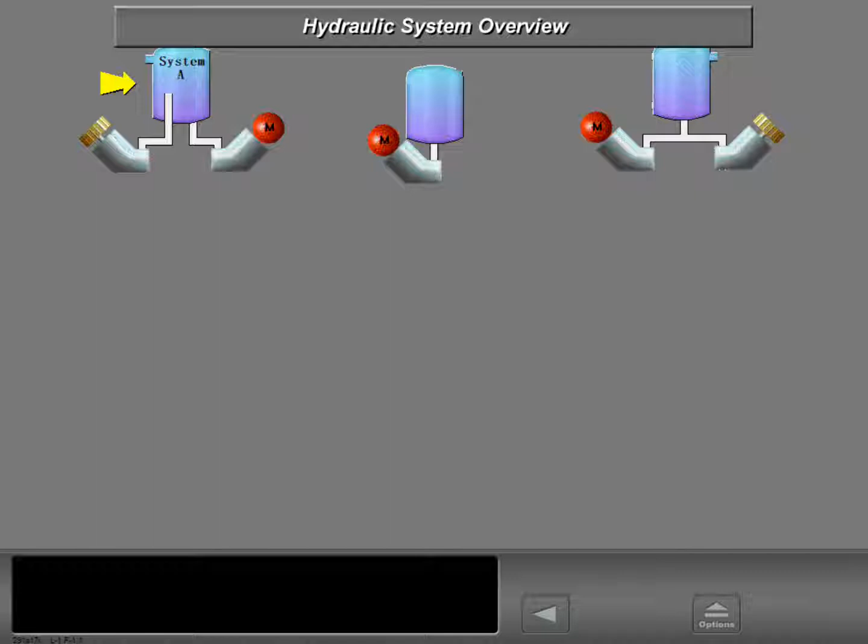The 737 has three hydraulic systems: System A, System B, and the standby system. The hydraulic systems have reservoirs in the main wheel well. System A and System B operate independently.

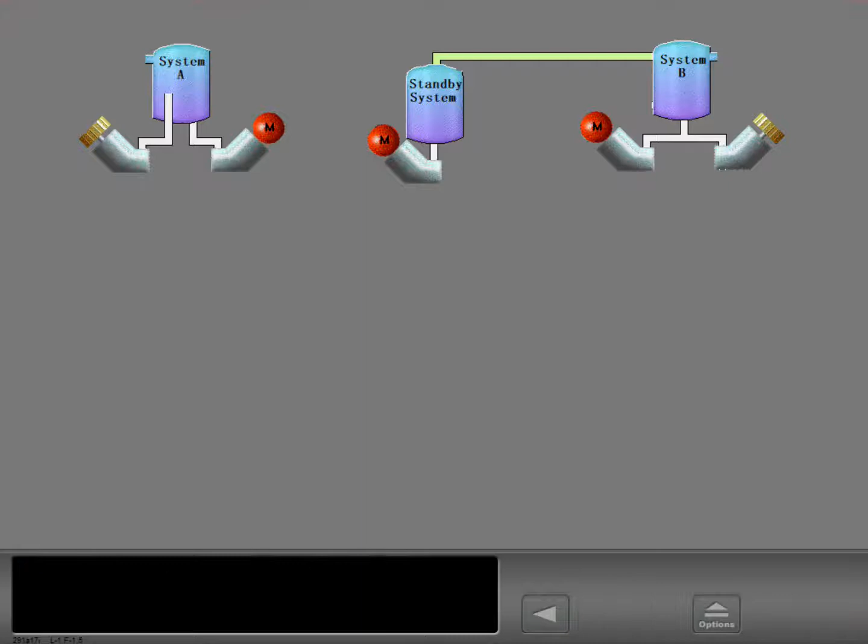The bleed air system supplies air pressure to System A and System B reservoirs to ensure a positive flow of fluid. System B supplies pressure for the standby system, and a hydraulic servicing line connects System B and the standby system.

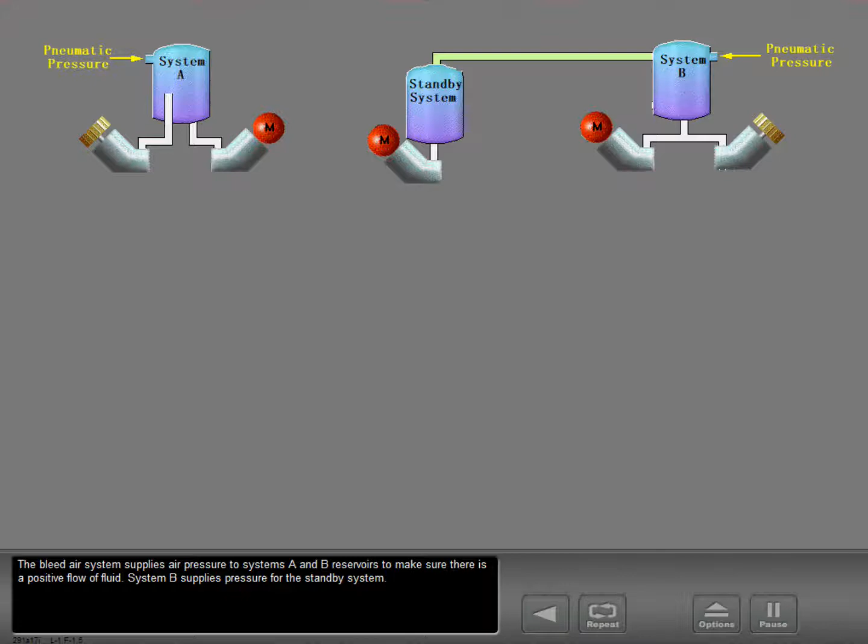The number 1 engine-driven hydraulic pump and an AC electric motor-driven pump supply the pressure for System A. Under normal conditions, the number 2 generator powers the electric motor-driven pump for System A.

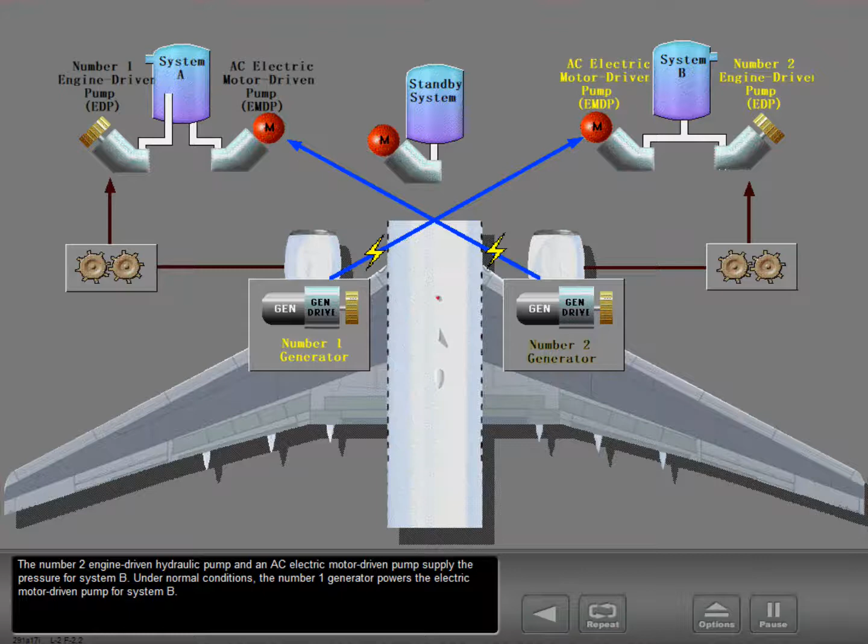The number 2 engine-driven hydraulic pump and an AC electric motor-driven pump supply the pressure for System B. Under normal conditions, the number 1 generator powers the electric motor-driven pump for System B. One AC electric motor-driven pump supplies the pressure for the standby system.

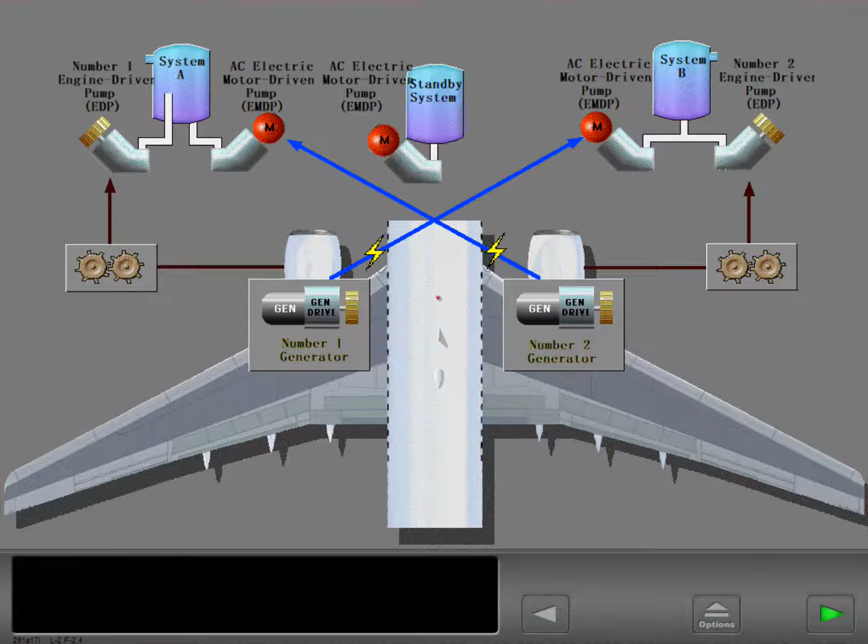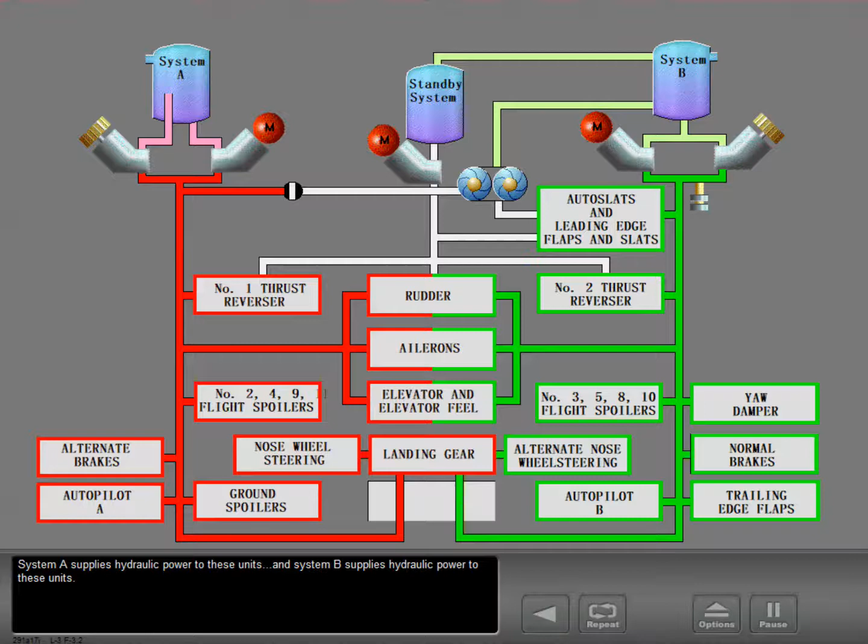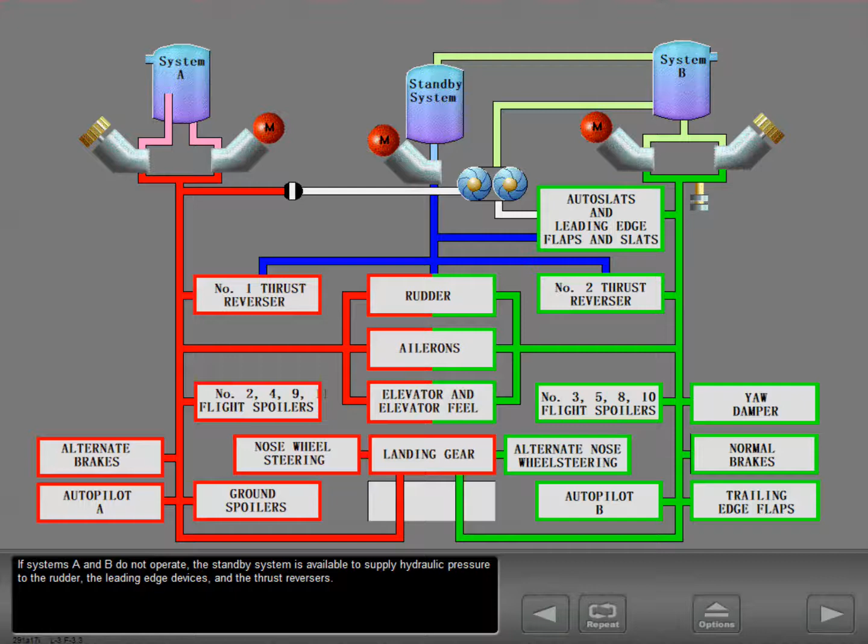System A supplies hydraulic power to these units, and System B supplies hydraulic power to these units. If Systems A and B do not operate, the standby system is available to supply hydraulic pressure to the rudder, the leading edge devices, and the thrust reversers.

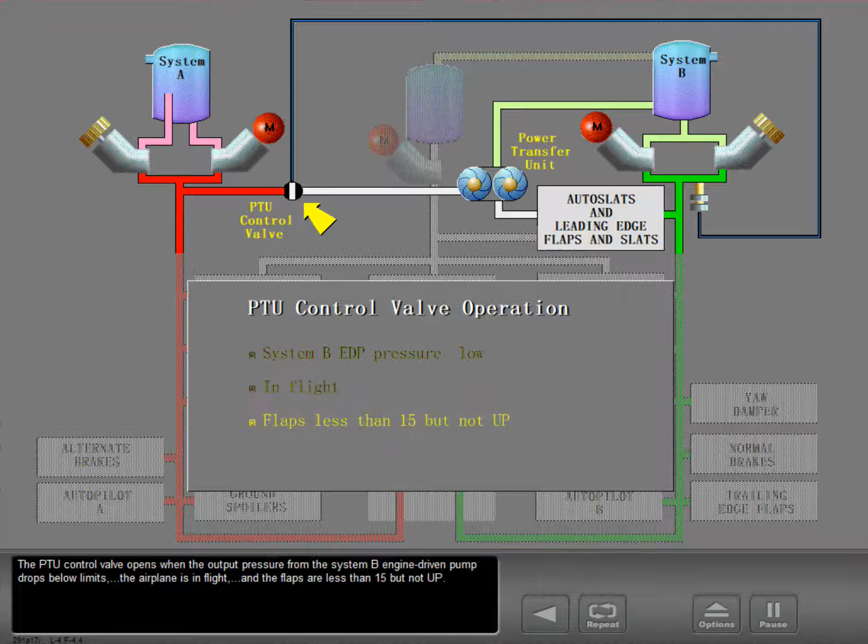The Power Transfer Unit, or PTU, supplies additional volume of hydraulic pressure to operate the auto slats and the leading edge flaps and slats at the normal rate when the pressure of the System B engine-driven pump drops below limits. The PTU control valve opens when the output pressure from the System B engine-driven pump drops below limits, the airplane is in flight, and the flaps are less than 15 but not up.

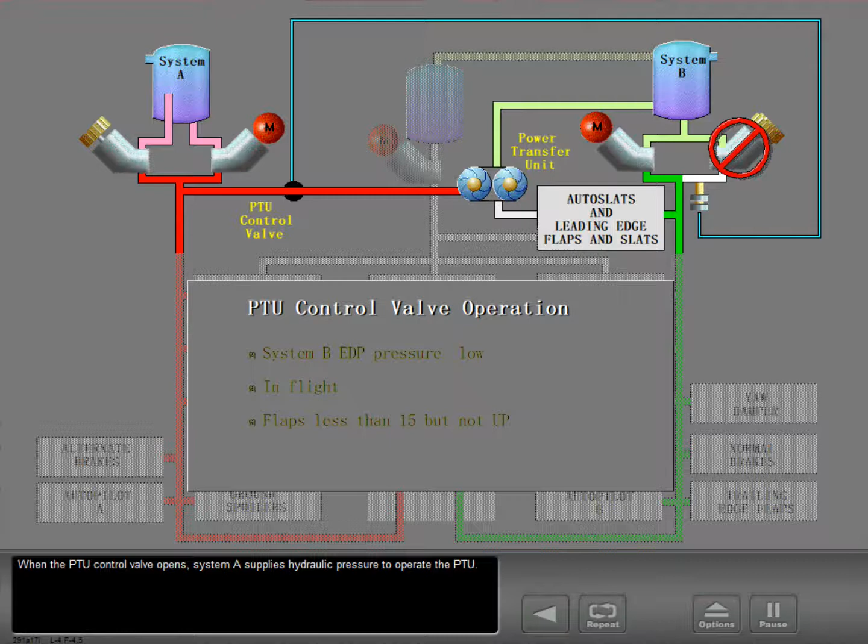When the PTU control valve opens, System A supplies hydraulic pressure to operate the PTU. The PTU uses System B fluid to supply pressure for the auto slat system and the leading edge flaps and slats.

If the number 1 engine fails, the landing gear transfer unit supplies hydraulic fluid volume from System B to raise the landing gear.

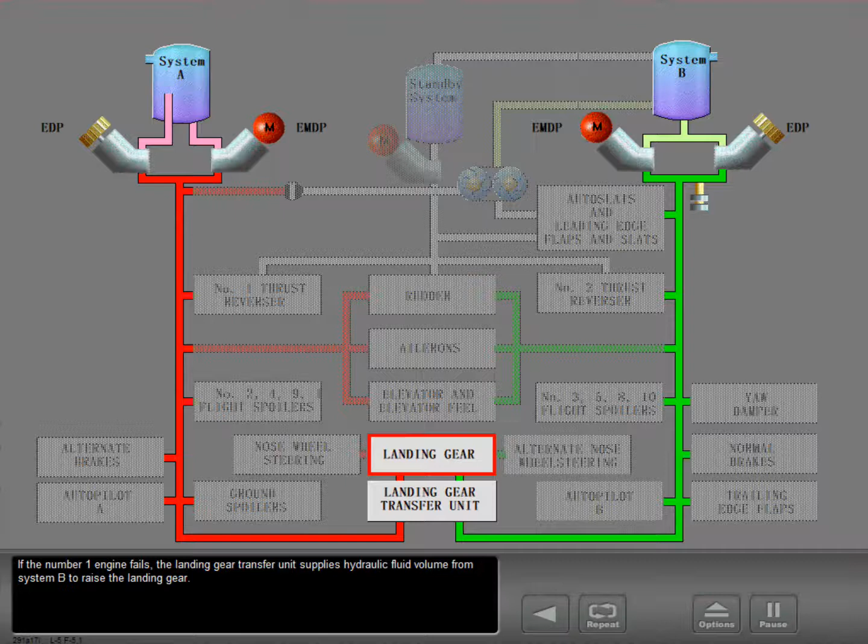In System A and System B, the engine-driven pumps supply a larger volume of fluid than the electric motor-driven pumps. If the left engine fails, System A does not supply sufficient hydraulic volume to quickly retract the landing gear. The electric motor-driven pump continues to operate as usual, but the total hydraulic volume of System A is less.

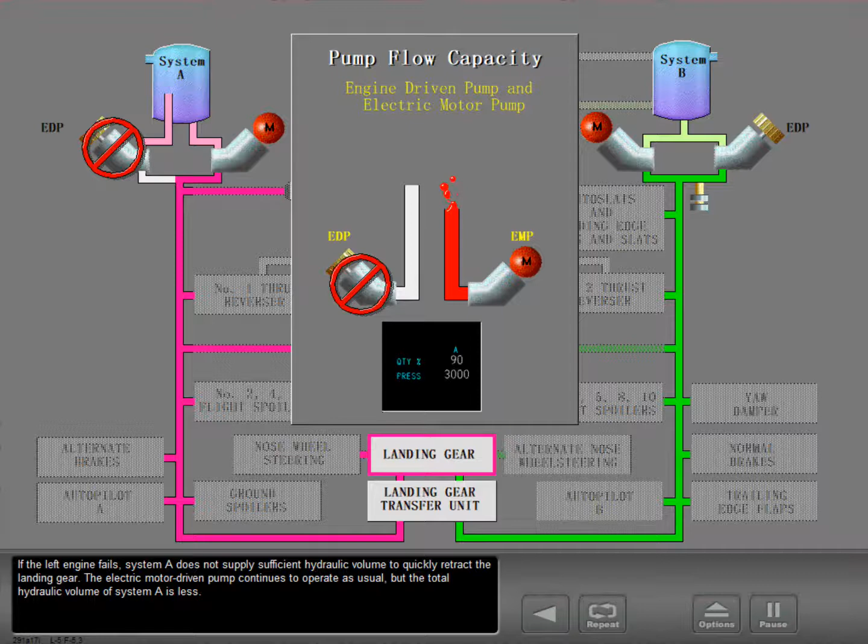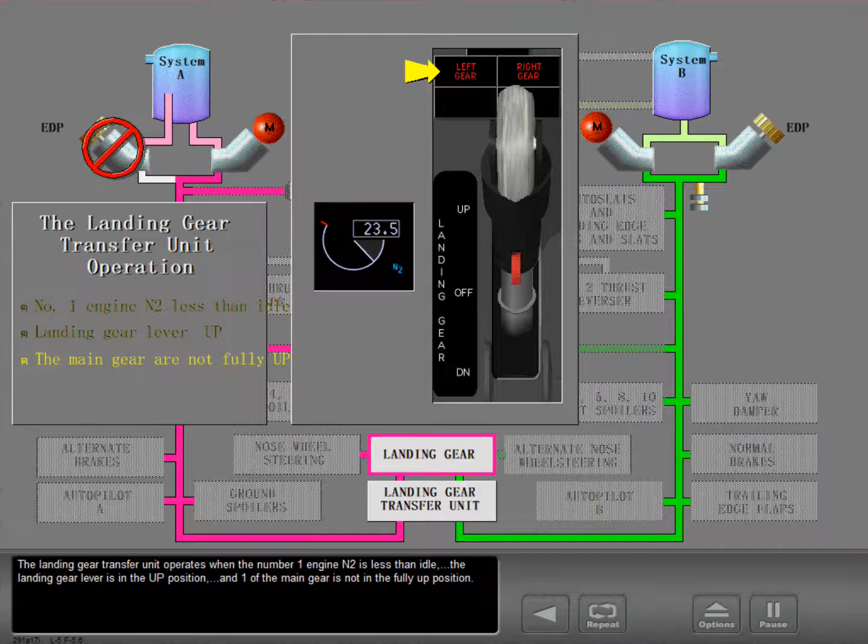The landing gear transfer unit operates when the number 1 engine N2 is less than idle, the landing gear lever is in the up position, and one of the main gear is not in the fully up position. The landing gear transfer unit supplies System B hydraulic fluid volume to retract the gear.

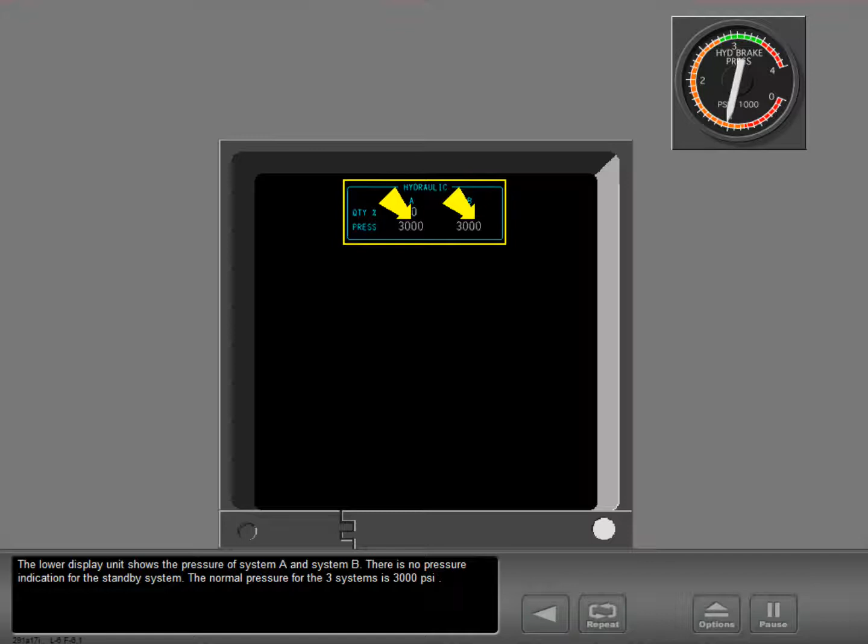The lower display unit shows the pressure of System A and System B. There is no pressure indication for the standby system. The normal pressure for the three systems is 3000 psi.

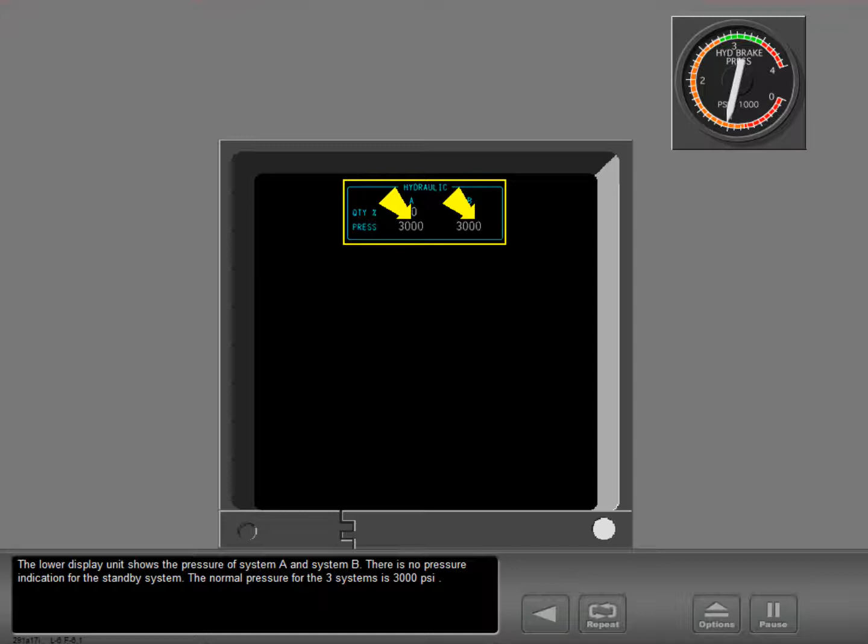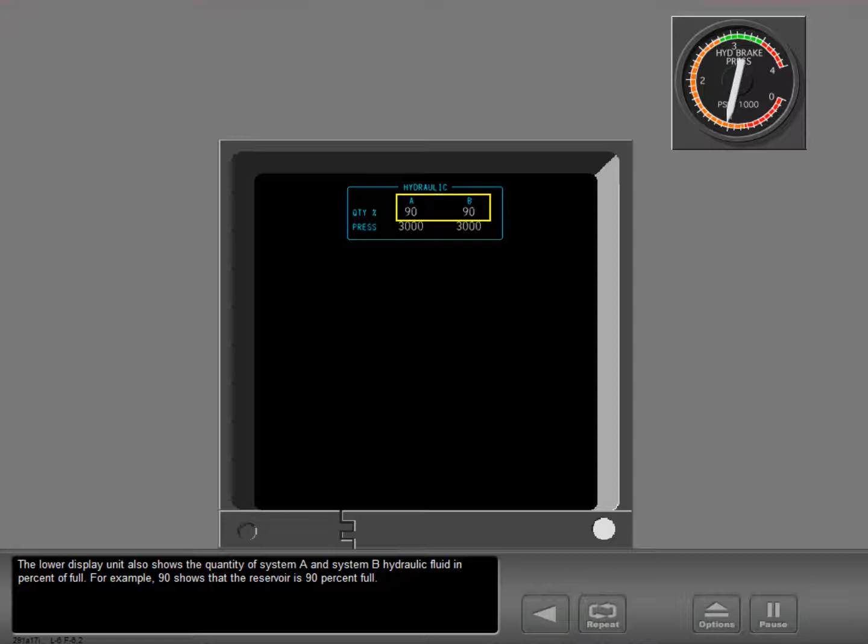The lower display unit also shows the quantity of System A and System B hydraulic fluid in percent of full. For example, 90 shows that the reservoir is 90% full. If the quantity is low and the airplane is on the ground, the system shows the letters RF, or refill, adjacent to the quantity indications.

The hydraulic brake pressure indicator shows the hydraulic brake pressure. The normal brake pressure is 3,000 psi.

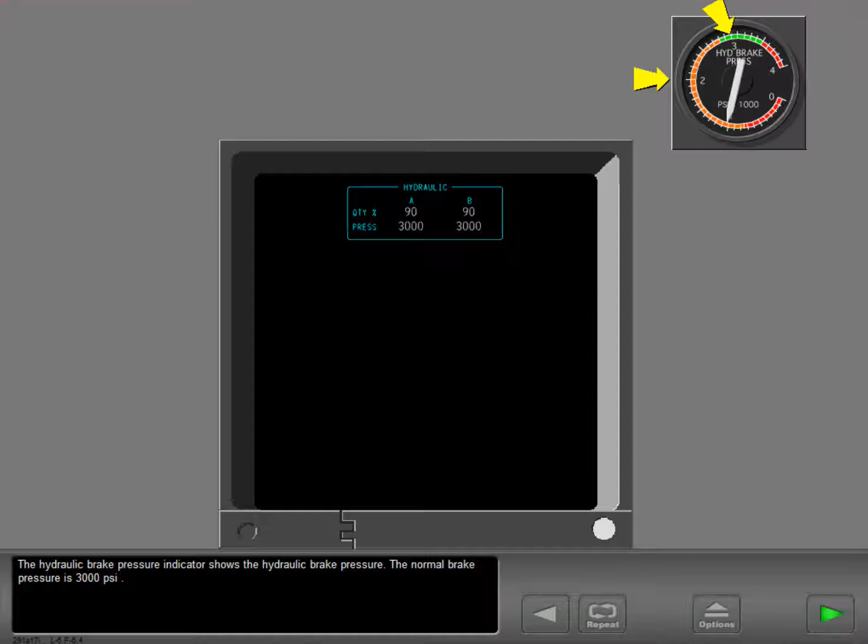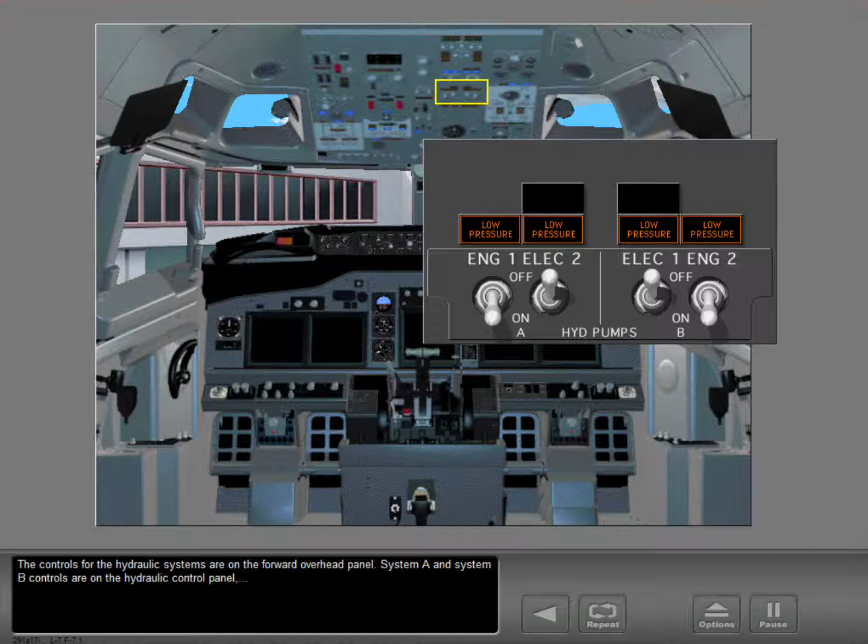The controls for the hydraulic systems are on the forward overhead panel. System A and System B controls are on the hydraulic control panel, and the standby system controls are on the flight control panel.